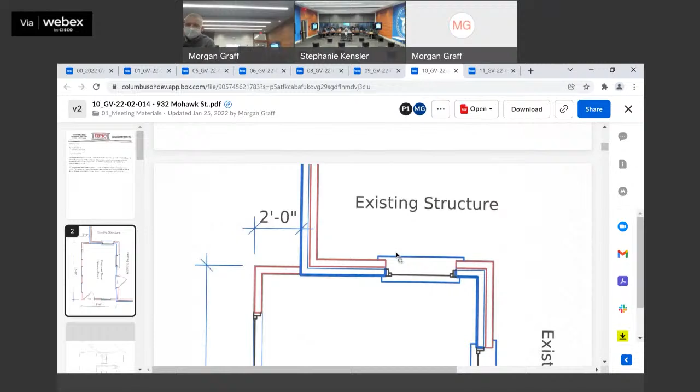Andrew Cole. Proposed work description: applicant proposes a 3 seasons room in the existing nook in the southeast corner of the structure. Proposed porch would roughly be the size of the existing covered area, with a small extension towards the east end of the building and 24 inches extension to the south. The overall area is approximately 9 feet 6 inches by 15 feet 8 inches. The existing cellar stairs will be removed, foundation repaired and surrounding finishes infilled. The existing porch roof and posts will be removed to make way for a proper structural design.

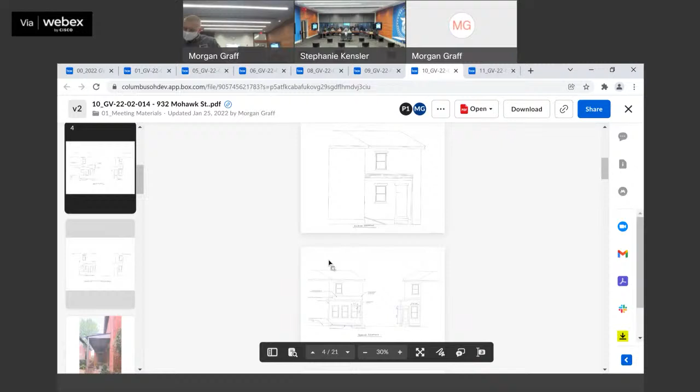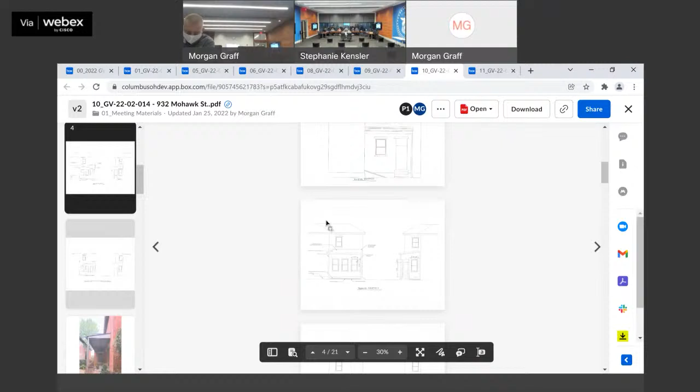At the past February business meeting, commissioners requested staff to locate the Sanborn maps of this property to clarify the date of the rear southeast porch area. Commissioners requested the applicant to clarify if the original openings of the existing main structure will change for the 3 seasons room, and if there's another access to the basement as other means of egress. Commissioners would like to see how the applicant is planning to tie into the existing building. They requested the applicant indicate where the property line is located, and also stated that this 3 seasons room floor plan has extended since the last drawings. This extension would mean the addition would be seen from the right of way, which has not typically been approved in the past.

Also, to wrap the original structure corner of the building is not typically permitted. Typically the commission wants to leave a reveal on the corner and leave it exposed. The commission should offer design feedback that can be utilized by the applicant to further refine the proposal for review at a future GVC meeting. No action is required.

Anything else to add? Just follow-ups to some of the questions - my responses didn't make it in on time. There are no changes to the original openings of the existing structure. There is currently other access to the basement through an interior stairwell. Fastening to the existing building would be determined by engineering details once we have a design in place, so I do not have the answers to how that would look just yet. As for property line location, we are approximately 9 foot 5 inches away from the property line to the south. It does not appear that any variances would be required. Those were the follow-up items I had that didn't make it in time.

Questions, comments from the commission? Do we know if the existing roof is historic? From the Sanborn maps, it looks like something was there. It is in the meeting materials, Stephanie, if you could scroll to the Sanborn map.

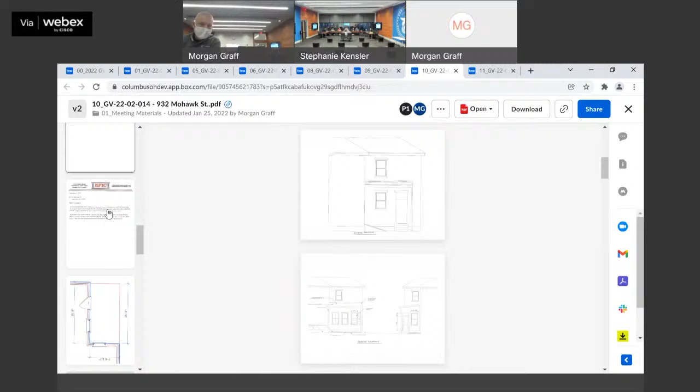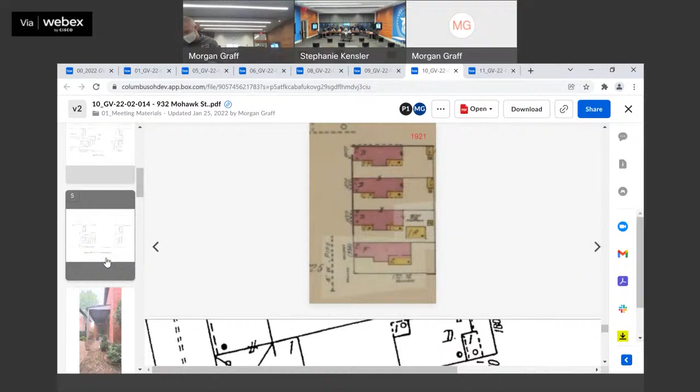See that flashing, pretty old. Yeah, that's the one picture of a step. For the applicant's sake, we're just trying to identify if it's historic material or not.

I think for the applicant, and for the commissioners, if we get past the term that it's not historic, comments on the proposed. We typically don't like to see the wall of the new wrapping the corner, so a detail that might help with that is something I think we can deal with.

The extension past is kind of my question as far as the sticking point, or if that becomes a sticking point. 2 feet beyond - with the existing structure size, it doesn't leave much space to make that a usable room. We've been before the commission before looking to do some work in the garage that we paused on and kind of pivoted. So looking at what they're trying to accomplish here, that additional 2 feet makes this a usable room versus really not what their intended purpose was to be.

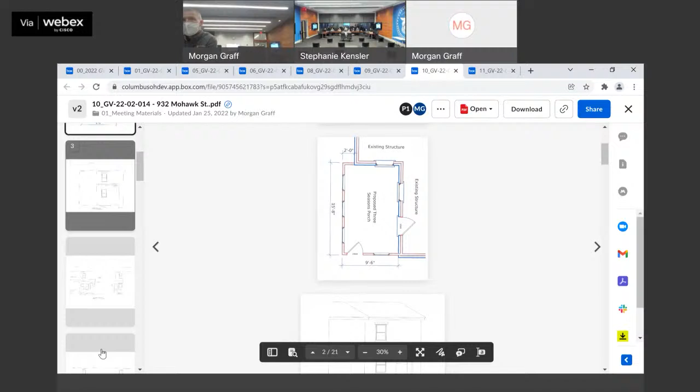What guidelines or information do you need to determine whether that is a historical roof? I think personally it looks like it, unless we can determine somehow that it's not. I'm under the assumption it is. I think it is too. I think that's probably good.

I think the post was in place at some point in time, but the plywood at the end is new. I think the plywood closure at the end is new too. Yeah, there are parts that seem to have been added to it. Right, it was probably just a sloped shed the whole way down. Yeah, that's what I was thinking.

So I'm going to ask the Commission, if it's simply a roof over the area and the rest of the structure that defines the porch is no longer there, how much is still there, and is what's there still worth it? I don't know if there ever was a porch there.

It may have just been a service area. With the cellar stairs there, I'd assume there probably wasn't a porch, but yeah. I guess it's as good as mine guess.

Are there any issues with removal of the cellar stairs? Is that an issue for anyone? You're going to be able to replace the furnace in the future? That's the only concern I have, with the existing stairwell in the house, and it's not just can the residents get down to the basement, but is there a big enough space for them to replace mechanicals that might have previously gone down through the cellar door?

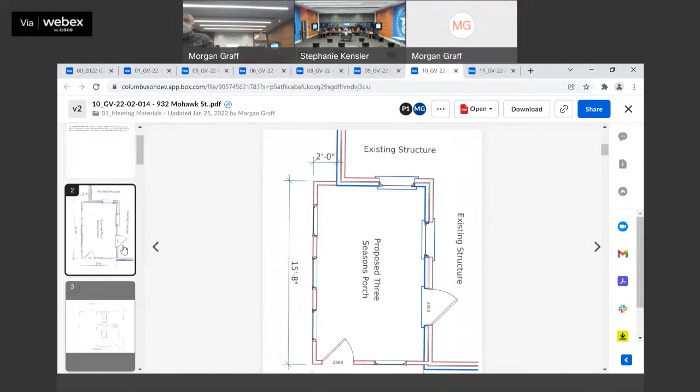Okay, I do have one question which may lead you down an architectural option. Right now I think your plans show a flat walkout into the 3-season room. If the height of the existing roof is problematic with that floor elevation, you could look at a step down to get some extra height to allow the roof to stay.

Yeah, I don't think we have that issue, actually I think there is a step down there. The height of the existing roof is not an issue, I don't believe. Now, I suppose there could be, I don't believe so, even with this proper structure.

Now, I guess if we end up having to step down or whatever the new design or design alternative is, that could create an issue as we step that down. So it may, but we could always step down an additional step or two out of the house if we need to. I'm guessing you'll still be able to make code compliance. Yeah, I would think so.

Is there, while I have a captive audience here, is there any preference for underneath said porch as far as foundation goes? We're not looking to do a full foundation, so it'll be more of a post-type structure, lattice work, things like that. Is there a preference, or just propose something and you vote on it?

Mohawk Street, Sycamore, one house up, they rebuilt that porch. Take a look at what they did right there. That would be my suggestion.

Okay, and the lattice doesn't speak to me. Look at the big front porch you have to build. But it's not very visible either, so I'm not super concerned. That's just- That is okay.

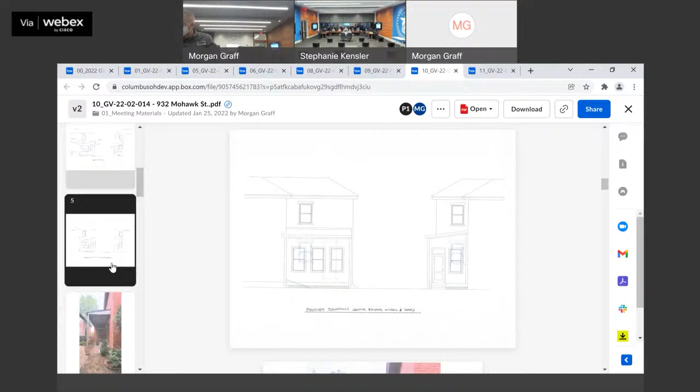East side of Mohawk, one house in Winwood, okay, big front porch. Anything else? I think I'm in good shape.

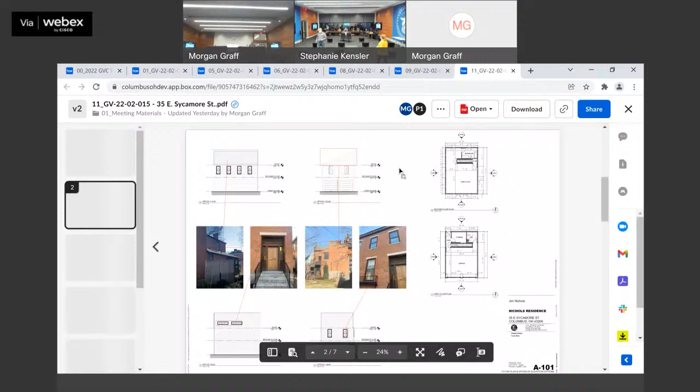GV-22-02-015. If I was seeing myself on this one. Okay, so I'm going to hang out in case either applicant comes back, and I've got to do mine still. Oh, you're still okay, I pushed it to the end just to get through this.

Can you please raise your right hand? You swear to tell the truth, the whole truth, and nothing but the truth? I do. And please state your name for the record. Casey Burns.

Proposed work description: the project proposes a detached two-story addition. The addition includes a garage and bathroom on the first floor, and a bathroom and guest room on the second floor. Finishes have been selected per German Village Commission guidelines and are outlined on the plans attached with this application.

At the past February business meeting, commissioners requested further photos of the alleyscape that include the existing buildings on Stimmel Street, which should include the heights of the adjacent adjoining structures. Commissioners stated that they typically do not approve kitchen and bath combinations in carriage houses, only kitchenettes. Commission should offer design feedback that can be utilized by the applicant to further refine the proposal for review at a future GVC meeting. No action is required.

Anything else to add? Just confirmation that there won't be a kitchen or kitchenette on the second floor, it'll just be a full bathroom. You've been here for previous conversations about two-car garages and the method? Yes.

Morgan, just a point of clarification, because you talk about this as being a late 19th century building. I think it's older. It was built between 1830 and 1835. Yeah, because it's Greek revival.

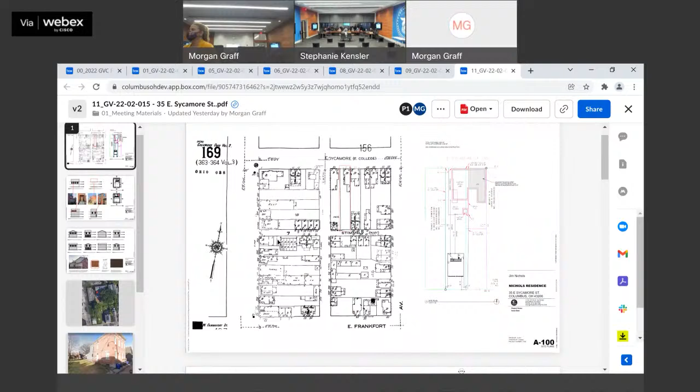The small area behind the main house is actually the oldest smokehouse and the only working one left in German Village. So we proposed a couple of different roof slopes to match the alleyscape, but the preferred roof slope matches the roof slope of that smokehouse.

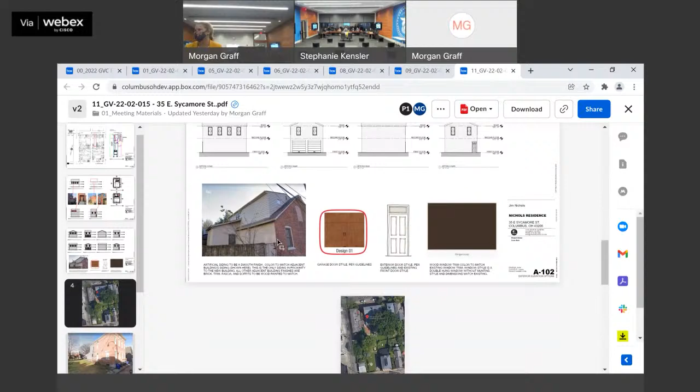Great house, I've only seen it from the outside, but I've heard it's really something. I knew they were doing a lot of work on it 2 years ago. But architecturally, it's a gem.

This seems familiar for some reason. No, this is the first conceptual. I just want to make sure it came for the business. Well...

This is really not a two-story addition, it's a two-story building added to the site. Yes, I guess it's an additional structure detached on the same site. We just need to keep the semantics right.

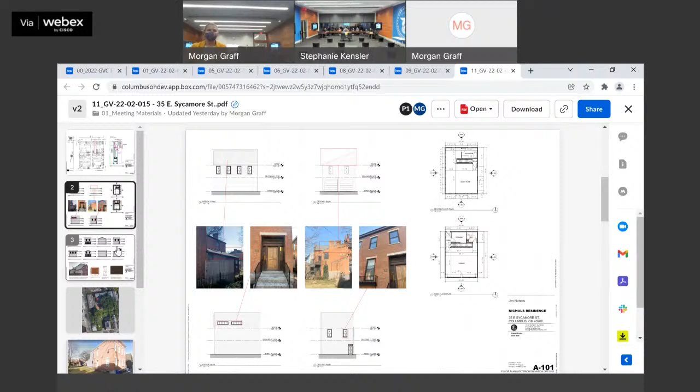So were you looking for comment? This is option 2. If comments can be provided, yes. We have 3 options for the roof slope. The first one is a single slope, it matches the slope of the structure across from the site, on the same site. And then 2 and 3 are just the difference between a gable or a hip roof, which more matches the streetscape but doesn't necessarily match the original buildings on the site.

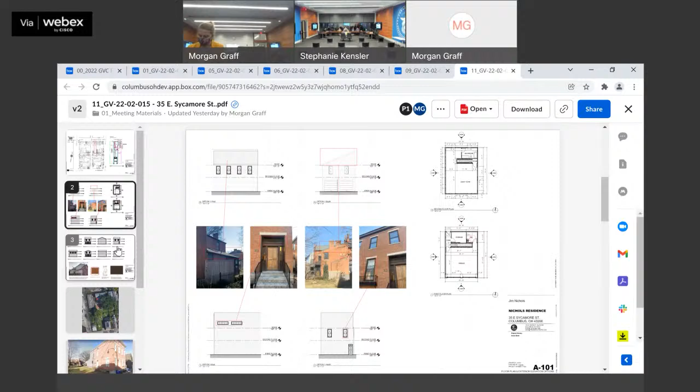My suggestion is go with the one you think is most appropriate, and justify it with the elevation of the street. Make sure you match the guidelines. Thoughts on the garage door? Page 3.

Circle 1, A-102. A lot of them like that. I just want to ask, I'm kind of over the battle of garage doors. So for garage selection, are you proposing wood? Yes, what are you thinking?

Wood, it was selected from the range of pre-approved options listed by the commission, so that was one that I pulled. Yeah, this is what we've staff-approved without the handles. Yeah, no handles, but we did staff-approve this style of work previously.

I know we've had some effort in the not-too-distant past of looking at newer-to-market door options that were not faux wood but a composite. So with this being more, if you go with option 1, a more non-traditional garage design, I just don't want you feeling you have to pen yourself into one style if you're having a different style. Okay, good to know. There's a smooth wood finish for this.

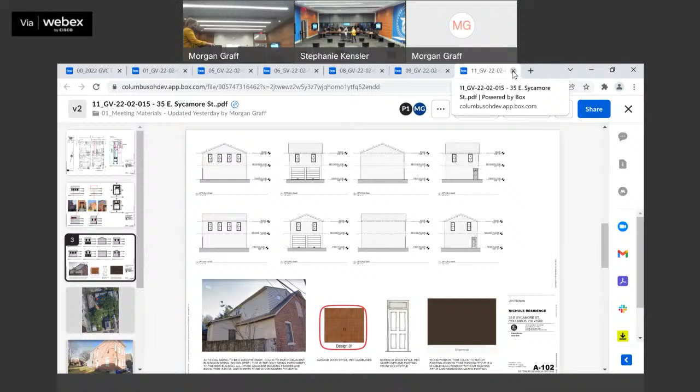Item 1, GV-22-02-007, 713 South 6th Street. Is there a motion to continue? I move to continue. Second.

What's the official language for that? So it's just, yeah, motion. Is there any objection? The motion carries. All right, so we have a motion on the table. We've got a second to continue. There's no objections. Hearing none, motion carries.

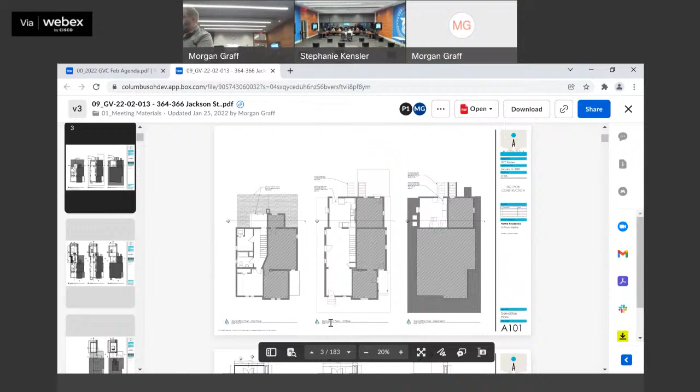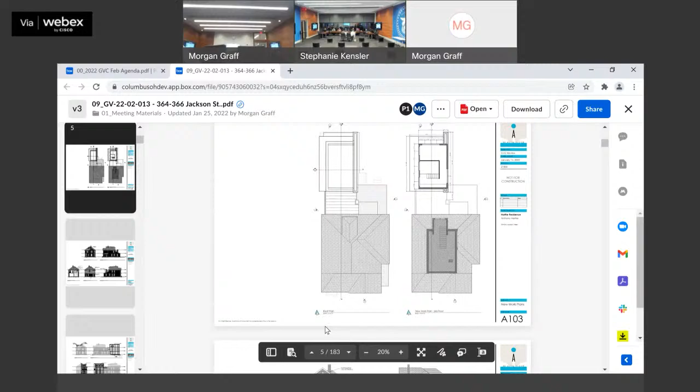Applicant plans to remove the existing rear bathroom dormer, add a second-floor addition to serve as the connector, and add a dormer on the rear existing roof to facilitate stair access to the existing third-floor attic space. Siding proposed to be smooth metal steel and architectural panels. Zoning variances will likely be required for existing conditions of the historic structure. No new conditions should require variances. Applicant would like to propose another siding option to replace the vinyl siding on the existing bathroom dormer to remain.

On the 366 side of the property to use as a test case. This material is called Easy Meg siding by Abet Laminati. This is a phenolic resin horizontal siding material that has installation options in both a bevel reveal as well as a lap installation. The siding appears to only come in 8-inch panels, but could be a simple manufacturing line change to add a 4-inch or 5-inch option.

At the past February business meeting, commissioners asked if the applicant owned both sides of the property. Applicant responded yes. Commissioners also asked if there was any future plan to expand the other side of the property. Applicant stated there's not an immediate plan to expand, but it can be an option for the future. Commissioners also requested physical samples be provided and presented at the hearing of proposed siding. The following is taken from the unapproved January 5th, 2022 German Village Commission hearing minutes.

Commissioners commented on aligning the horizontals on the addition with the existing structure for more rhythmic massing. Commissioners thought the material change was good. Commissioners requested physical examples of the material for the next review. Staff recommends approval, with any and all clarification to be submitted to HPO staff for review and approval prior to issuance of certificate. This is based off German Village Guidelines, page 93, additions, number 2 and number 4.

So since last time I was here, there was a little bit of change to the elevations, the rear elevation there. Essentially what we did is we took the third floor and set it back a little bit to have it recede, so it doesn't read as one giant mass. Looking to get some head nods from the commission on the architecture massing.

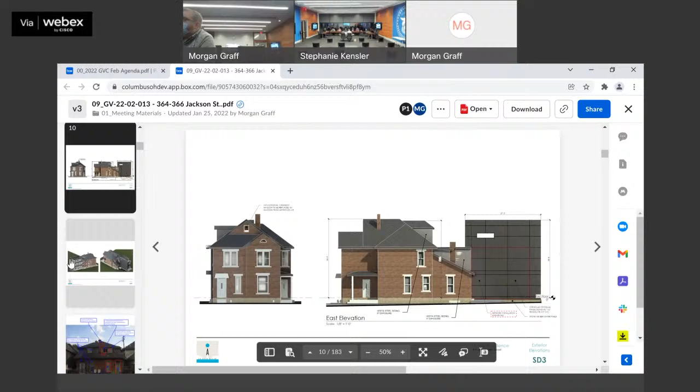You're backing up to a parking lot, a large parking lot, under construction. Right? Yeah, Starbucks is kind of catty corner back there. And Children's Hospital, yeah, so the top of it all.

I'm not kidding, I would. I would tell you architecturally, just do it, man. Just do it. But being in German Village, that's the struggle. Yeah, that's my struggle. Yeah, I understand.

I would say that the only view of this is going to be from the backyard and from Dan Poland's yard, towards the fence. From the view you can get from Grant, the cross street over, it's going to be the view of the bottom left corner, the left side of the sheet. That's the view from the only public way you can see this thing, and it's going to be all rear yard.

Anthony, I heard you say too that it's either going to be an art installation on the wall, in the section marked in red. Is that correct? Yeah, that's the intent, to put something on there, because I agree it has mass to it, and it's flat.

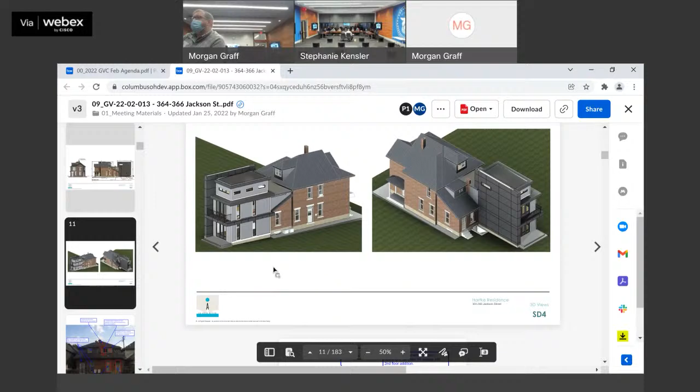Go back to the floor plans. Yeah, you talked about what's driving up there right now. The intent is that's just a loft space above the primary bedroom.

Yeah, it's existing. If you go one more sheet down, you see the stairway - we're gonna have an alternate tread stair built into the casework closet. So basically bringing that room, the south wall and the east wall, bedroom with closet space, because we have no storage in the house whatsoever. Second floor is kind of more of a solitary retreat for Erica to go up there and have her space to do her thing. I get the office on the first floor, so it's kind of give and take.

The original intent was that wall is going to be solid on the first floor because we don't want to have fire code issues if we add on. We want to keep the wall solid on the second floor too because of the casework. We just kept it solid all the way up. But I think that opens up some opportunity to pull some light in from the other side. We just had the windows a little higher just to let that read.

If you looked on Grant, now the garage door case that came before us - there's a garage that has a big divider wall between it. That's kind of what we're driving to. And that's legit what they did.

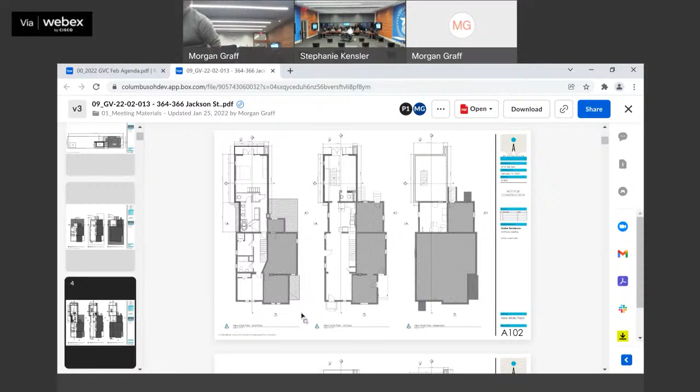So I think it's coming to the market, maybe an option for us down the road if we can get that profile. Anthony, the horizontal metal siding, where would you think about using that? That's the only one I'm concerned about. You got the elevation on the drawings?

So on the drawings, the light gray area is proposing metal siding. Anybody want a second look at this stuff?

Take it back over to you. You want me there? Yeah. You can leave it there, I'll get it after. Morgan wants to only see it. I'll bring it.

My concern is we specifically say no aluminum siding, and we get the reasons for that. Is this similar enough to aluminum siding that it could be taken that way and cause a slippery slope problem, or is it okay? I think it's different enough in that it doesn't have the smaller profile trying to mimic wood clapboard siding. It's meant to be a larger format exposure. It's not very flexible, it's steel as opposed to aluminum, and it's got pre-finish on it.

I don't think so. It's kind of like Hardie versus Boral, where we don't like Hardie because it transmits waviness. It gets the Boral look. It is a metal material, and it's not lapped. No, it's not, but it's got... Oil canning or anything like that? Yeah, it's thick enough that it won't get oil canning, and it's got that little bit of reveal to it.

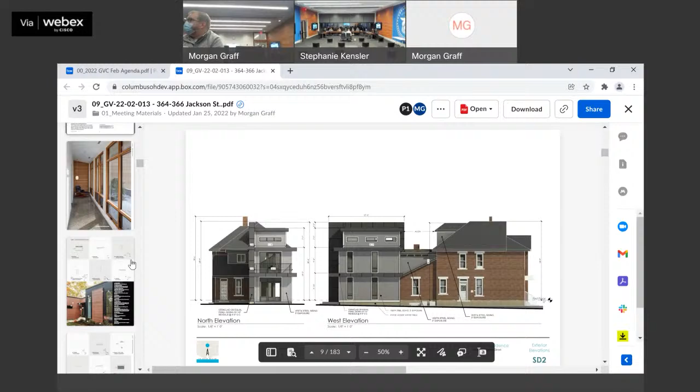If you scroll down in the materials, there's some literature for that, showing what it looks like on a full facade as opposed to just two pieces. Yeah, those right there, that's the look it gives. The fact that it's smooth as opposed to lap really is what sets it apart. It's almost like nickel, yeah. But you wouldn't get anything.

These are just different finishes - you can get smooth, get rough. What size is this? That can come in large format panels. I think you can get it down to about a 6 to 7 inch strip of that material. They have hidden fasteners, exposed fasteners, and they have an adhesive fastener where you adhere it to your backing material.

Spectacular variety. And the last thing to show you, we're not proposing this either, but came across it. This is the same company, Quality Edge, that does the metal siding, the steel siding. This is a product they produce for soffits and ventilation. So this is a fancier metal, but being on the soffit shouldn't be too big of a deal.

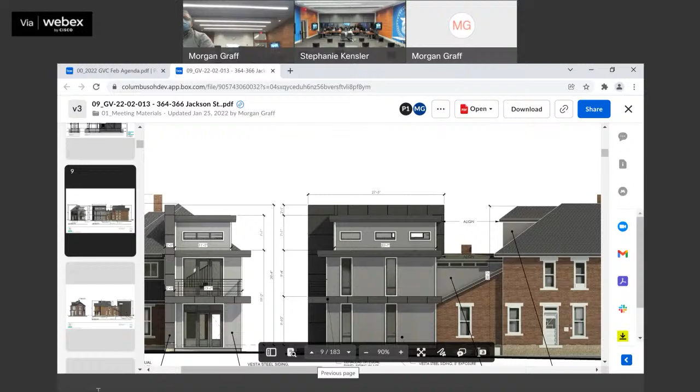I'm looking at it from the other side. What's that outline, the other elevation? Yeah, it's the one elevation. Well, it's just—you're just seeing the sheer wall, you're saying. That's the side that I'm looking at.

And that was the intent of trying to put either a living wall or an artificial living wall or an art installation. One idea I had was trying to do a string grid outline, like a village string light, to put something on it just to break up the massing. We talked about maybe popping a little ledge overhang off of there, but that just looked weird. But Anthony, the fact that you're talking about that and trying to mitigate that tells me that's a problem for you also.

There's a piece of me that has a problem with it, but at the same time, the other piece of me really likes it. So I'm trying to find a way to make it work. I do too, and my suggestion is to keep most of it, but take some off the top. There is something to the fact that if you were to keep it high, it's crazy - this darkness of it. Continuing is weird, it makes it like a stone monolith rather than something that's...

Not continuing it because the chimney that exists there. I get why - there's something to it. At least it's hard in pure elevation to judge it too.

There's a part of me that's really attracted to the evilness that is telling me - I want to see what's inside that window. I know, it does, it does. It's like, what is that? What is that there?

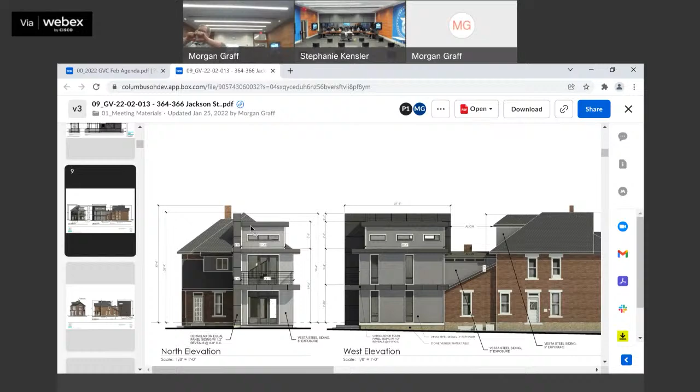Really look at trying to bring the first floor, the second floor - if you look at the elevation, the panel size changes right there at the transition. I looked at bringing that through a bit, but it just didn't look right, so I pushed it back and kept the panel strip to kind of read around and try to break it. It's hard to design for one side of a house.

If what Teresa had said about taking, you know, and showing that as kind of proud of the wall on that side - but what if all of those did that so that then it wasn't quite as big a monolith?

You'd have something there and then you trace another piece and see how this one comes through. So on the second floor roof, loft floor - look at the side elevation, the west elevation, it doesn't extend to the end of the wall, so that's why it's not there.

We weren't using the same material to come through. So I would say that the second floor should stay flush, and just use the height of the panel to read around, like it currently is.

Take a look at the second floor roof - that would poke through it all. Look at the loft roof, look at bringing it down. Look at a couple options there and we'll decide which ones we like the most.

We'll bring one or two of those back. I think the difference is, what Teresa was saying, is you're making - I don't know if it makes sense to do that at the roof of the first floor and second floor - but you were talking about it being proud of the wall. Yeah, it would just have to be sticking out.